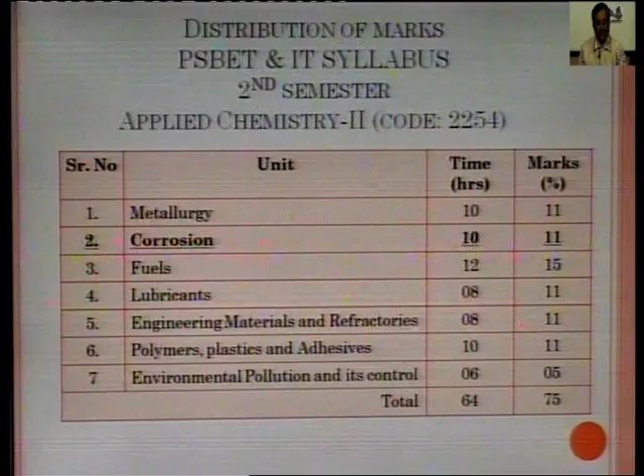I am here to talk on the corrosion preventive measures, specifically internal corrosion preventive measures. Before we begin, it is important to know the syllabus for diploma students studying in Punjab, affiliated to Punjab State Board of Technical Education and Industrial Training. The second chapter comprises corrosion, of 10 hours duration, and according to the state syllabus, the total marks expected from this chapter is around 10 or 12.

So the content we are going to study under corrosion is the definition of corrosion, theories of corrosion, other forms of corrosion, preventive measures either by internal measures or external measures, protective coatings, applications of corrosion protection, and erosion in boilers.

However, in this lecture we are going to talk on the prevention and control measures by internal measures, either by purification, alloying with corrosion resistant elements, or heat treatment methods.

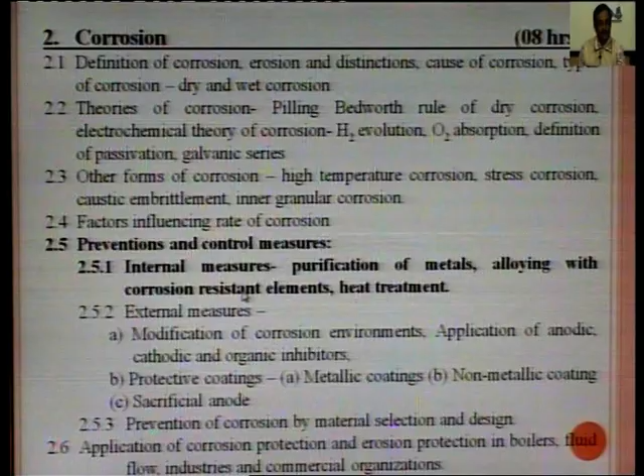It is important to understand what corrosion is before going to preventive measures. The deterioration of materials, the metal or alloy which we use - they lose their chemical properties either by chemical attack or by electrochemical reactions with the environment. So the deterioration of a material or metal alloy in its properties by electrochemical or chemical reaction with environment is called corrosion. There are some examples which we come across in our day to day life.

We have seen rusting of iron, during which a brown scale of powder, ferrosoferric oxide, is formed on the surface of iron in presence of moisture and air. Then iron becomes weak and loses its entire properties.

You also must have witnessed development of a greenish blue color in case of copper. The formation of a green layer of basic carbonate, that is cupric carbonate, on the surface of copper is also an example of corrosion.

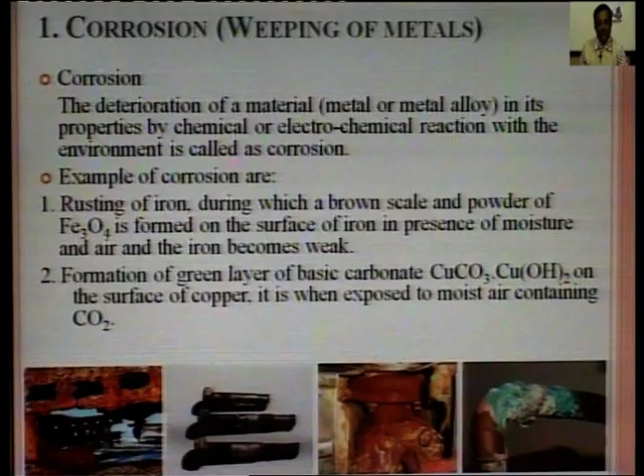So this is the definition of corrosion. Let us see why metals corrode. In a sense, corrosion is nothing but a reverse process of metallurgy.

In the light of metallurgy, we take metal ore and subject it to metallurgical operations, and then we get a metal. Suppose if you plot a graph of energy of the metal and ore - metal oxides, metal sulfides, or metal chlorides, these ores are converted into metals by metallurgical operations. That is the reaction we carry out in industries. By doing so, the metal ore changes to metal, and the energy content of the metal is more as compared to the energy content of the metal ore.

In nature, if any material is at a higher energetic level, it is bound to lose its energy and get stabilized. Therefore, the reverse process predominantly takes place - the ore is thermodynamically the stable state, and through metallurgical operations we get pure metal, which is thermodynamically an unstable state. Due to environmental effect, our pure metal gets corroded back to a thermodynamically more stable state. As a result, most metals obtained from metallurgical operations are likely to get corroded.

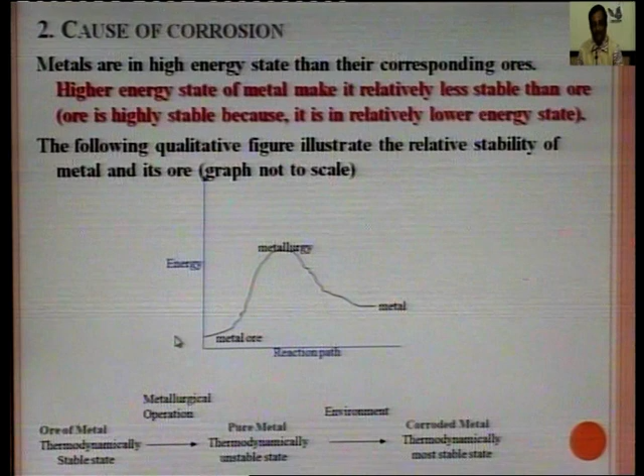So why should we study corrosion? Corrosion should be studied because corrosion of metal leads to loss of useful properties of the metal or metal alloy we use, and its efficiency decreases drastically, leading to a decrease in production rate since replacement of the corroded part of the equipment is time consuming.

For example, suppose you manufacture iron and it gets corroded - the amount of ore required to get that much metal is not sufficiently available in the earth's crust. As a result, this creates an imbalance between demand and supply, leading to a very problematic situation.

Once we manufacture any metal product, its lifetime is very important, and corrosion will increase its maintenance cost as well as its production cost.

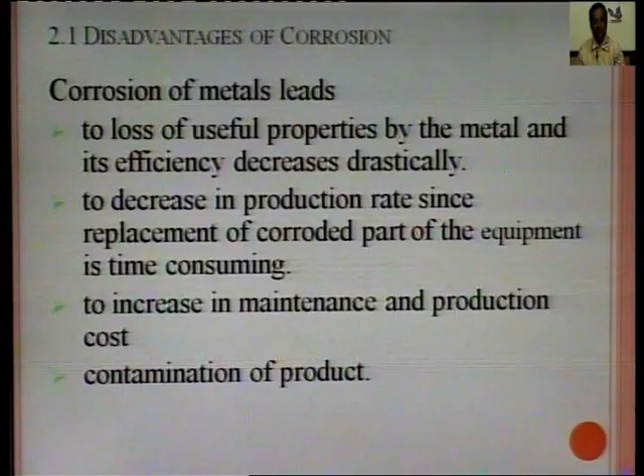So, it is important to decrease this corrosion; we have to study the corrosion. Important studies increase the useful life of metal parts through corrosion prevention control measures. By study of corrosion, metal worth many million rupees a year is saved in the whole world by following suitable corrosion preventive methods.

The study of corrosion has ultimately led to the discovery of corrosion resistant alloys like stainless steel, bronze, etc. In fact, we came to know the alloys only in the venture of corrosion resistant material; then we invented the alloys.

The electrochemical nature of the corrosion process has been substantially used in industry as an etching process. For example, if we want to mark anything on glass, it would be by etching technology. Even printed circuit boards, in which the rest of the material is eroded by corrosion techniques. So, corrosion methods will also be useful for etching processes.

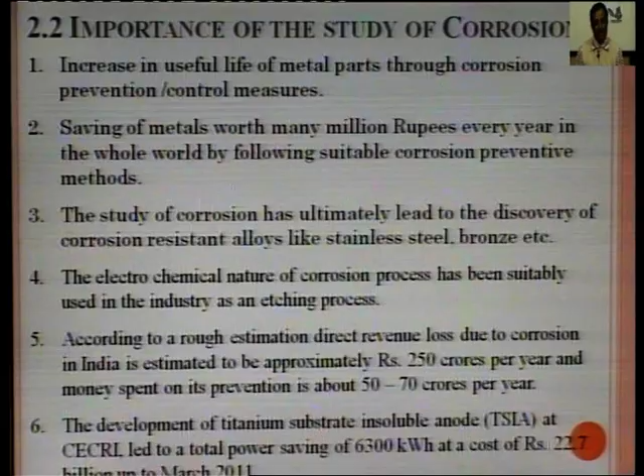The Central Electrochemical Research Institute situated in Karaikudi, Tamil Nadu is fully engaged in the research and development of materials which are corrosion preventive in nature by themselves. This institution was established in 1953 and dedicated to the nation under CSIR by Dr. Sarvepalli Radhakrishnan at that time. It is doing wonderful research work in the field of corrosion preventive measures.

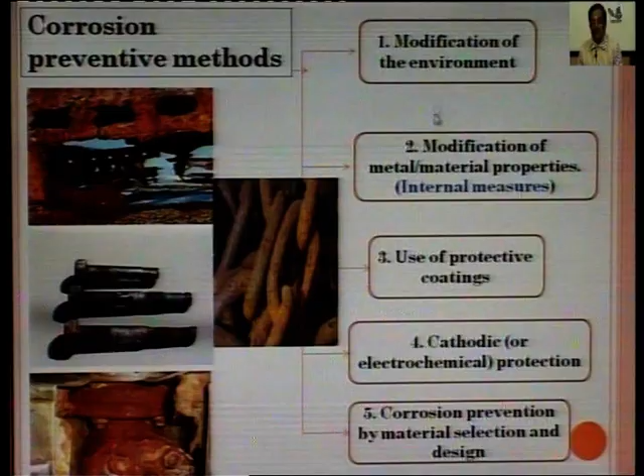So, today's lecture is all focused on internal corrosion preventive measures. Let us have in-depth knowledge about the different types of corrosion preventive methods. There are a few methods of corrosion prevention, such as modification of the environment; second, modification of material properties, also called internal measures; use of protective coatings; cathodic or electrochemical protection; and corrosion prevention by material selection and design. Apart from these, there may be other methods as well, but these are the important ones.

In the previous slides, you saw the modification of environment. What do you mean by that? Corrosion can be stopped or retarded substantially by modification of the environment in which the material is being used. For example, you must have seen silica packets being placed which absorb the moisture, and that will prevent corrosion. These are small examples.

However, it is not always possible or convenient to modify the environment to be non-conducive to corrosion. For example, in the chemical industry we use inhibitors, but use of inhibitors may lead to product contamination, which will severely affect the quality as well as the price of the product. Therefore, to minimize such disadvantages of modifying the environment, it is better to modify the metal or alloy properties while manufacturing itself, so that it can retard the corrosion rate.

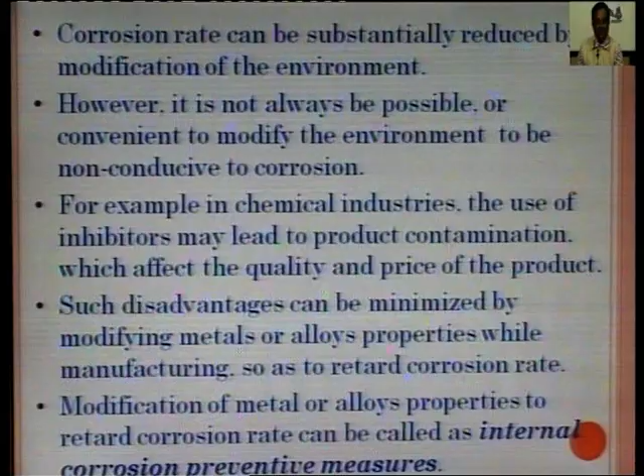Therefore, modification of metal or alloy properties to retard corrosion rate can be called internal corrosion preventive measures. They are nothing but the modification of metal or alloy properties to make them fit for retardation of corrosion. So, let us take a look at the modification of material properties, the internal corrosion preventive measures. As the proverb says, prevention is better than cure. Corrosion preventive measures can be initiated while manufacturing metals or alloys.

What are the methods by which you can modify the metal's properties? Will it be helpful for us even after modification? Certainly yes. Number 1, alloying, you must have heard about it. The second one is refining of metals, that is, purification, and the third is heat treatment. Under heat treatment we have annealing, normalizing, hardening or quenching, tempering, austempering, case hardening, surface hardening, etc.

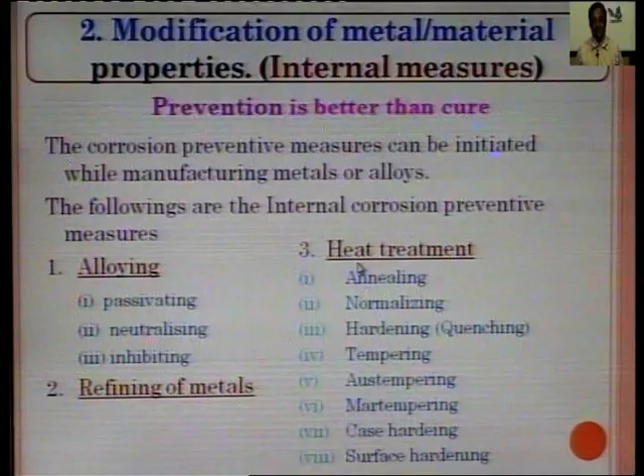From the point of view of your examination and understanding, we will discuss internal corrosion preventive measures in light of the following points: alloying, which can be passivating, neutralizing, or inhibiting, then refining of metals, as well as heat treatment methods. One of the best examples of alloying is the pillar near the Qutub Minar, which shows very little corrosion. So, how did they do it? It is just by alloying.

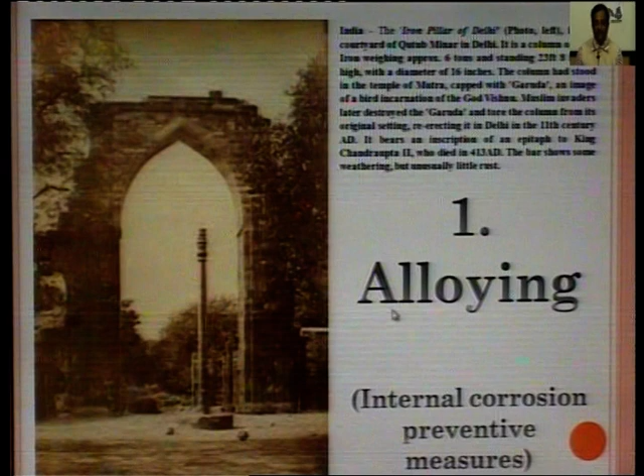What do you mean by alloy? Alloy is a homogeneous mixture of two or more metals along with some non-metals in proper proportions. Okay. So, alloys have a wide range of advantages in resisting corrosion. However, every alloy does not resist all corrosives.

The moment we say alloying, for example, let us consider stainless steel. Stainless steel means, as the name itself says, it is stainless, means it will not corrode. This is a misconception in the mind of some students. So, let us not elaborate the misconceptions. To remove these misconceptions, see, the alloys, that is stainless steel, is also undergoing corrosion,

because alloys are nothing but homogeneous mixtures of two or more metals, and when we mix them together to make it homogeneous, that alloy is prepared or manufactured for a particular specific task or use. So, in that particular environment, it can act as corrosion resistant, but the same alloy cannot be corrosion resistant to all atmospheres.

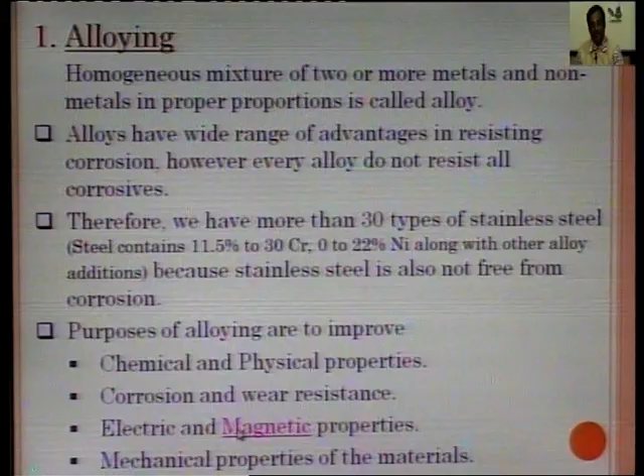So, what is the mechanism by which alloying can prevent corrosion? The mechanisms by which alloying of a metal enhances the corrosion resistance are: maximum homogeneity. Greater the tendency of an alloying addition to form an alloy, greater will be the corrosion resistance. For example, if you mix copper and zinc, we get brass. They have a greater tendency to mix with each other because of their approximately same size. As a result, it is easy to make alloys of such metals to prevent corrosion, not at the cost of the properties which we require in their service conditions.

Formation of oxide films on the metal surface also determines the corrosion resistance capacity. For example, Duriron, an alloy of silicon and iron, is very resistant to acid due to the formation of silicon dioxide on its surface. So, alloying additions for increasing corrosion resistance may be for passivating, neutralizing, inhibiting.

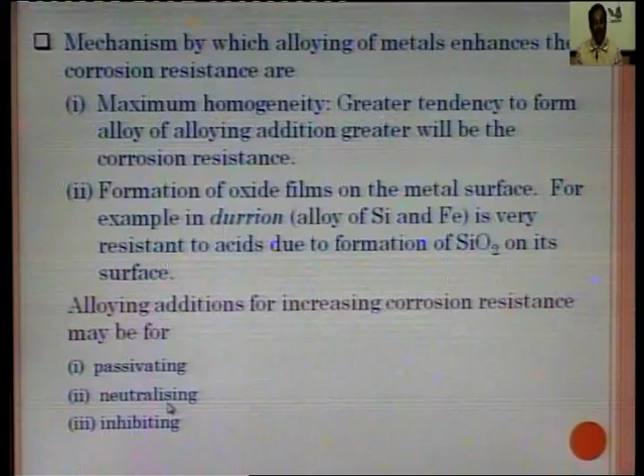Let us see passivating. You must have studied passivity, that means certain metals exceptionally show higher corrosion resistance than expected from their position in the chemical series. For instance, aluminum, chromium, cobalt, nickel, titanium, etc. are passive to prevailing corrosion environments, as they are capable of forming an insoluble non-porous film on their surface. All these metals and their alloys exhibit outstanding corrosion resistance.

For example, nickel steel and nichrome. Nickel steel composition has 36% nickel with iron. It has practically zero coefficient of expansion, and it is used for making measuring instruments. Nichrome composition, nickel 60%, chromium 12%. It has good resistance to oxidation and heat, hence it is used in making resistance coils, heating coils, etc.

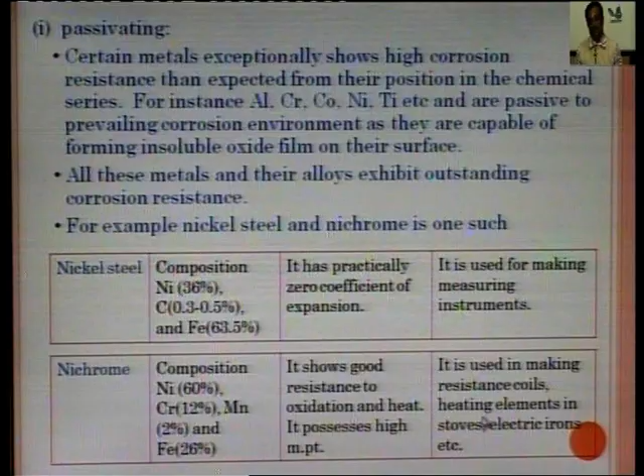So, neutralizing means addition of titanium, niobium, tantalum to the steel forms respective carbides and makes the stainless steel corrosion resistant. Sulfur is one such non-metal which is not expected to be present in the metal or alloy, because it develops cracks, that is a corrosion as well. This problem can be reduced considerably by addition of manganese and copper to reduce the sulfur percentage.

The sulfur percentage in steel can improve only machinability, but it is only for that purpose; we cannot keep it for a longer time. However, the sulfur impurities have to be removed to the maximum extent.

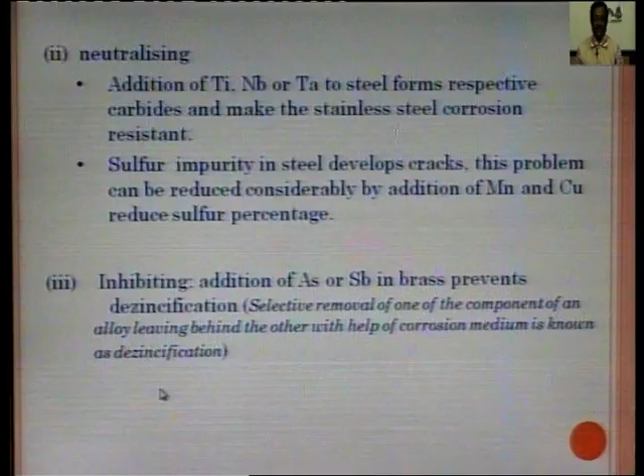The third, inhibiting method: addition of arsenic and antimony in brass prevents dezincification. Dezincification means selective removal of one of the components of an alloy, leaving behind the other, with the help of a corrosion medium. So, these are the methods of alloying.

Let us come to the second, refining the metals. Refining of metals means purification of metals. When metals or alloys are manufactured, these are generally heterogeneous. As you know, heterogeneity can give provision for local corrosion to take place, development of electrochemical cells which enhances the corrosion. Therefore, they are heterogeneous, consisting of two or more phases, either as a component or as an impurity present in them.

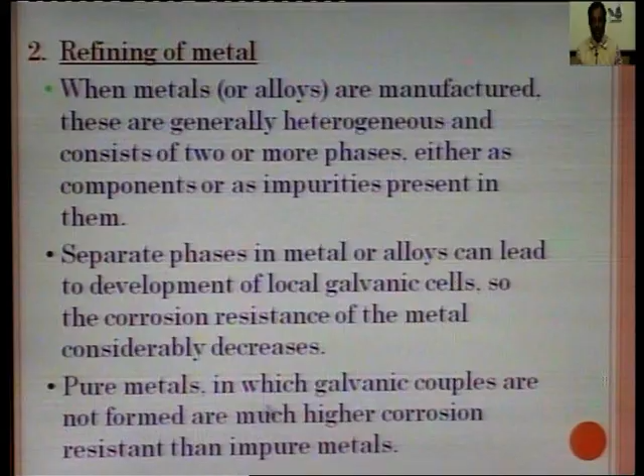A separate phase in a metal or alloy can lead to development of a local galvanic cell. So, the corrosion resistance of the metal considerably decreases. In other words, pure metals, in which galvanic couples are not formed, have much higher corrosion resistance than impure metals. Let us consider an example, that is the loss of weight by aluminum metal rods of different purity kept in contact with 20% hydrochloric acid solution.